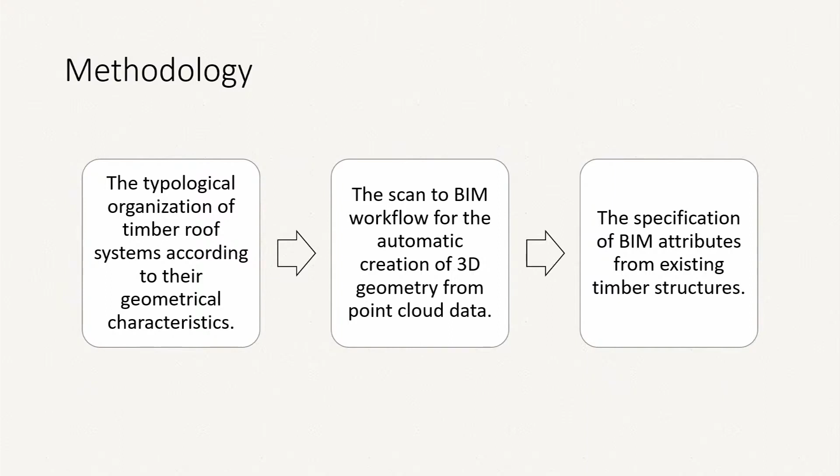The methodology starts with the typological organization of timber roof systems according to their geometrical characteristics. Then is the Scan-to-BIM workflow for the automatic creation of 3D geometry from point cloud data. And then is the specification of BIM attributes from existing timber structures. The typologies are related to heritage buildings, but also buildings to be reconstructed and demolished with a timber roof construction.

The aim of the typological organization is to assist the Scan-to-BIM methodology by organizing early in advance the capturing of existing data, the segmentation, and the creation of BIM geometry with high levels of detail. Furthermore, the typology of the structures and the respective geometrical data contains material and structural attributes that allow the examination of the level of maintenance.

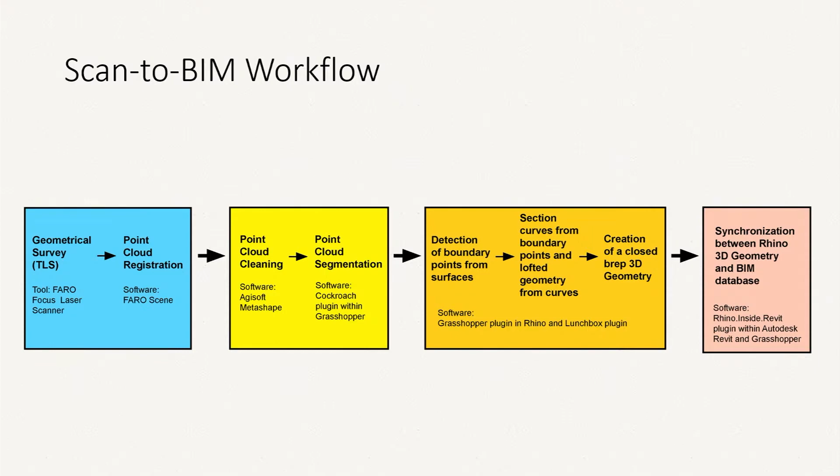This is the Scan-to-BIM workflow. It starts with a geometrical survey using terrestrial laser scanning through a Faro Focus Laser Scanner. Then the point cloud is registered within Faro Scene. After the point cloud is exported, it is cleaned using Agisoft Metashape, and then the point cloud is segmented using the Cockroach plugin within Grasshopper.

After the segmentation, there's an algorithmic process in the Grasshopper plugin in Rhino and Lunchbox plugin, which starts with the detection of boundary points from surfaces, the creation of section curves from the boundary points, lofted geometry from the curves, and the creation of a closed BREP 3D geometry. This 3D geometry is synchronized with a BIM database using the Rhino Inside Revit plugin within Autodesk Revit and Grasshopper.

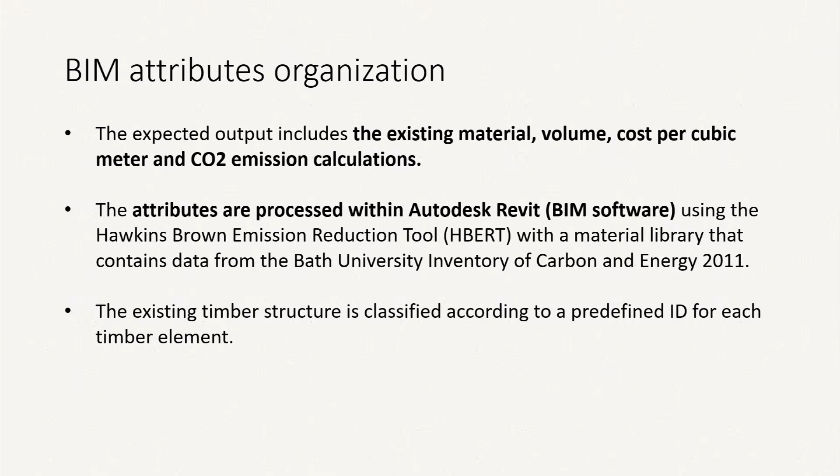The BIM attributes include the existing material, the volume, the cost per cubic meter, and carbon emission calculations. The attributes are processed in Autodesk Revit using the Hawkins-Brown emission reduction tool with a material library that contains data from the Bath University Inventory of Carbon and Energy 2011. The existing timber structure is classified according to a predefined ID for each timber element.

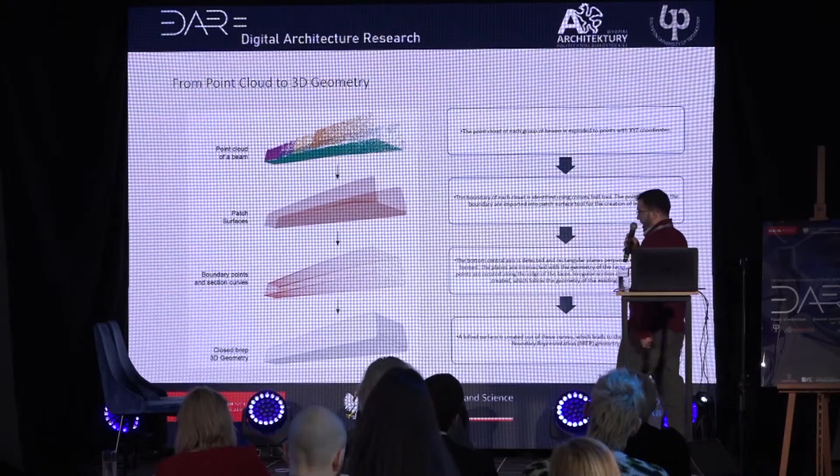And then on the third image, you can see the boundary points and section curves. Basically, the bottom central axis is detected, and rectangular planes perpendicular to the axis are formed. The planes are intersected with the geometry of the faces, and the boundary points are created along the edge of the faces. Irregular section curves of each beam are created which follow the geometry of the existing structure.

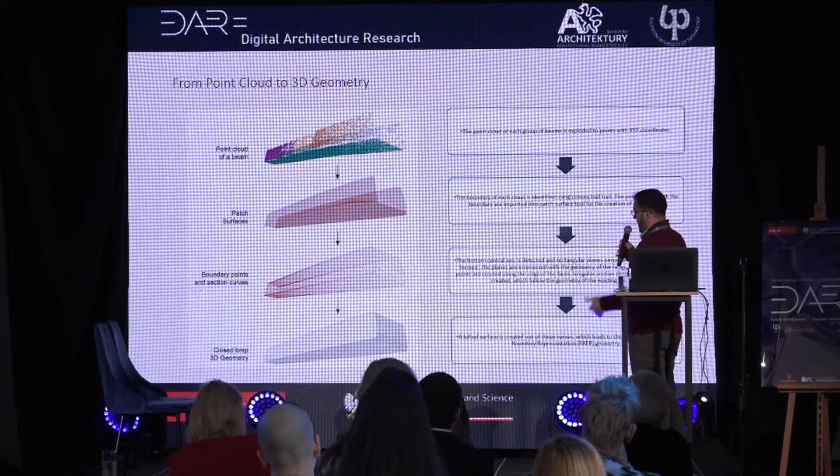And as you can see, on the faces, these are the points that are detected, which are necessary to identify the geometry of the existing beam. And the lines that you see are the connections of these points that create 100 to 300 section curves according to the type of geometry developed. And on the bottom is the closed BREP 3D geometry created.

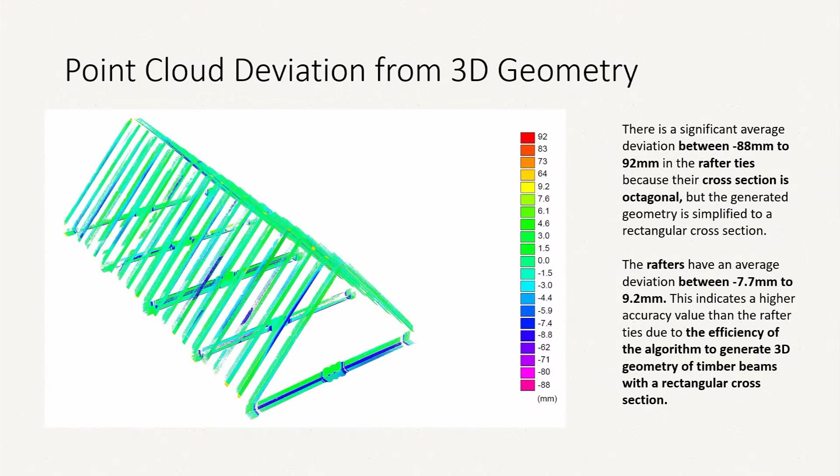In contrast to this, the rafter ties had lower accuracy, and the deviation was between minus 88 and 92 millimeters. And this happens because their cross-section is octagonal rather than rectangular, and the generated geometry is simplified to a rectangular cross-section.

The 3D data created is synchronized within Autodesk Revit using, as I said, the Rhino Inside Revit plugin. The geometry direct shape is used, and also the category is defined, which is structural framing, the 3D geometry, and the corresponding material. And the material that is used from the HBERT library is HBA wood softwood, because the existing material is pine timber. And furthermore, an ID is also set for each beam.

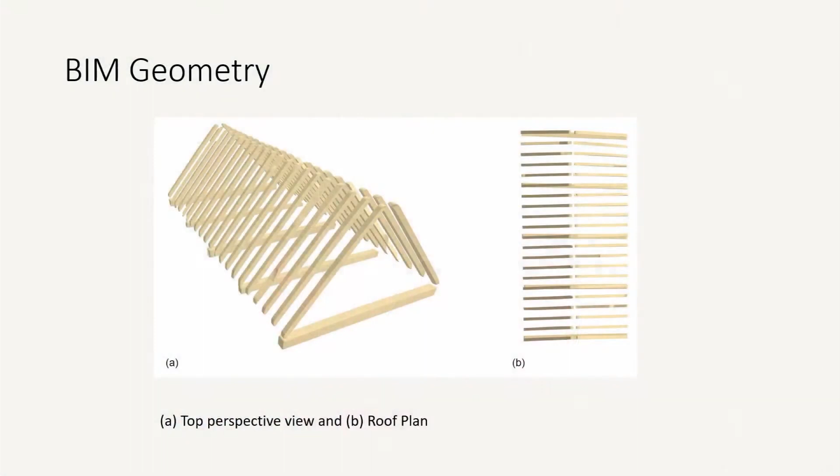This is the geometry that is automatically generated and is synchronized within BIM software. On the left is the top perspective view, and on the right is the roof plan. And as you can clearly see, there are some irregularities detected due to the architecture of the building, which is a heritage building, and usually these buildings have irregularities.

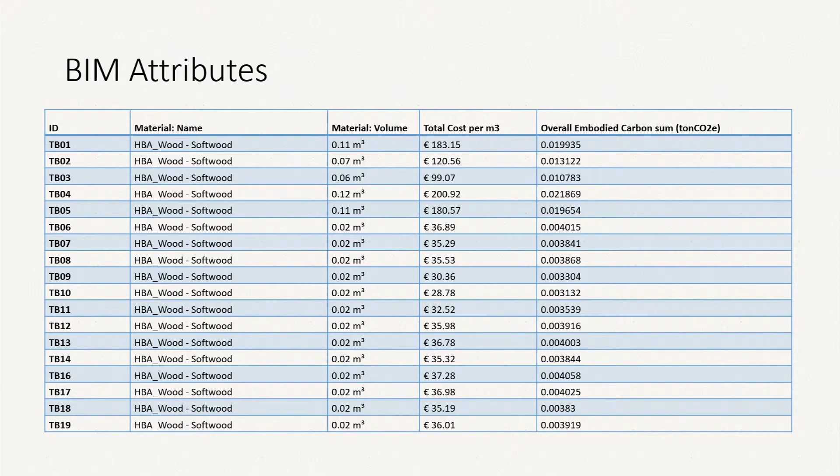These are the BIM attributes from this process. On the left, you can see the ID that is defined for each beam, the material, and then the volume that is detected, the total cost per cubic meter, and the overall embodied carbon sum. In total, the beams are 47, but eventually the volume of 11 out of these beams could not be calculated due to scanning issues mentioned previously.

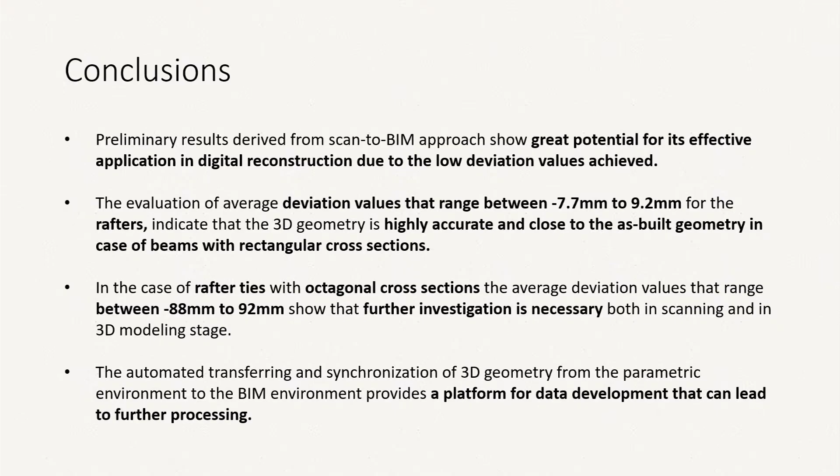In conclusion, preliminary results derived from the Scan-to-BIM approach show great potential for its effective application in digital reconstruction due to the low deviation values achieved. The evaluation of average deviation values that range between minus 7.7 millimeters to 9.2 millimeters for the rafters indicate that the 3D geometry is highly accurate and close to the as-built geometry in case of beams with a rectangular cross-section.

In the case of rafter ties with octagonal cross-sections, the average deviation values that range between minus 88 to 92 millimeters show that further investigation is necessary both in the scanning and in the 3D modeling stage. The automated transferring and synchronization of 3D geometry from the parametric environment to the BIM environment provides a platform for data development that can lead to further processing.

The potential for calculating CO2 emissions along with the corresponding cost for each timber beam provides us with BIM attributes that allow decisions to be made as regards the preservation, recycling, and reuse of existing timber elements. Future studies may include additional laser scans in the interior of the church in order to capture the missing volume of the geometry from 11 beams that could not be calculated in BIM.

And further laser scanning could be done on the exterior of the church for achieving the generation of 3D geometry of more timber structural elements such as the ridge, wall plate, and battens. Further research is also necessary for a much more detailed result for the rafter ties that contain octagonal cross-sections.

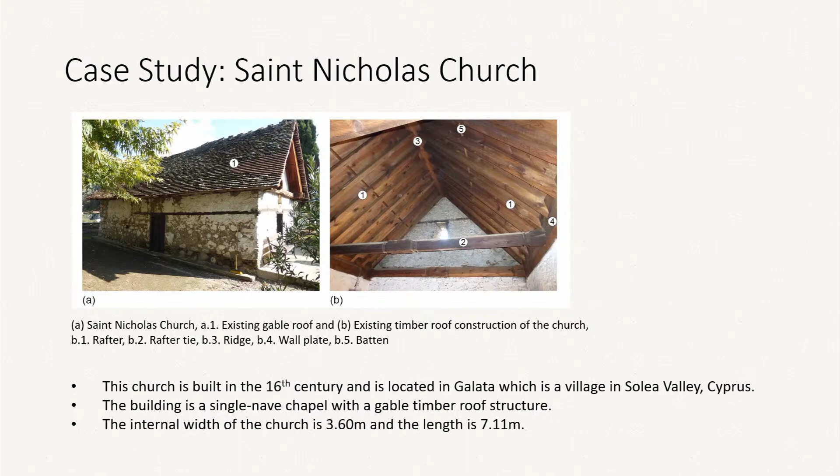In order to also find the joints, I have to do a scanning on the outside, because, I can show you an image. So as you can see here, on the top is the ridge. This ridge is visible from the outside, from the exterior. So I had to find the cross-section of that and then generate that geometry, and then it's going to be connected with the other ones. The same with the wall plate, because it's not visible from the inside. It's visible from the outside, so the same happens there. So if I have this, then the beams could be connected.

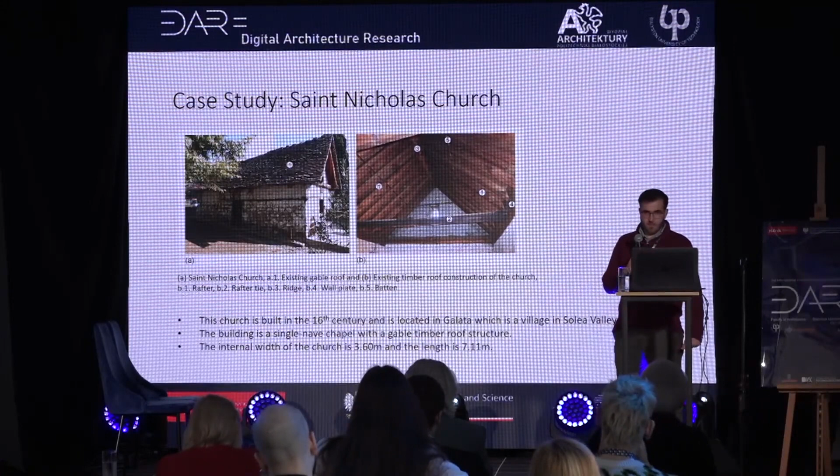Hello. Thank you for the presentation. I missed the start a little bit, so I didn't know what you really focus on. Is the CO2 thing the main focus, or what do you want to achieve with it? The main focus is basically the automatic generation of 3D geometry from point cloud data.

Okay, then I understand, because in this case I was wondering if it is necessary to have so much precision, because you could just imagine that these beams would be of similar size, and as long as you have the number of them, you can have a rough calculation pretty quickly, and many of them probably are the same size. And it doesn't really matter if on the fifth decimal there is something different. But to show the workflow, it makes sense.

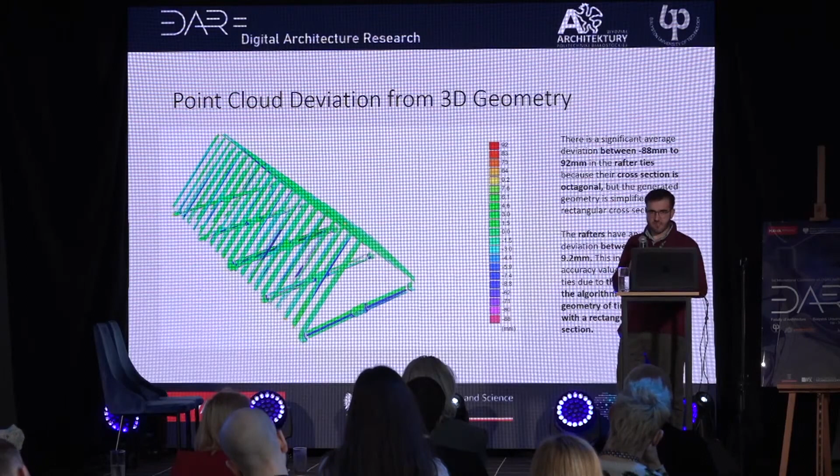Yeah, I understand that. Yeah, the aim is to identify also the irregularities of the geometries, because it's a heritage building. Sure. Yeah, because wood, and old wood, is never the same. But it depends what you want to have as an outcome. But the rafter ties have different dimensions, but not that much, as you said. But there are some changes in the volume.

Yeah, but okay, it's a question of how many numbers behind the 0 point really matter. So therefore I was wondering, but it's an interesting workflow and it might be usable for a lot of things. Thanks. Thank you. Thank you for the presentation.

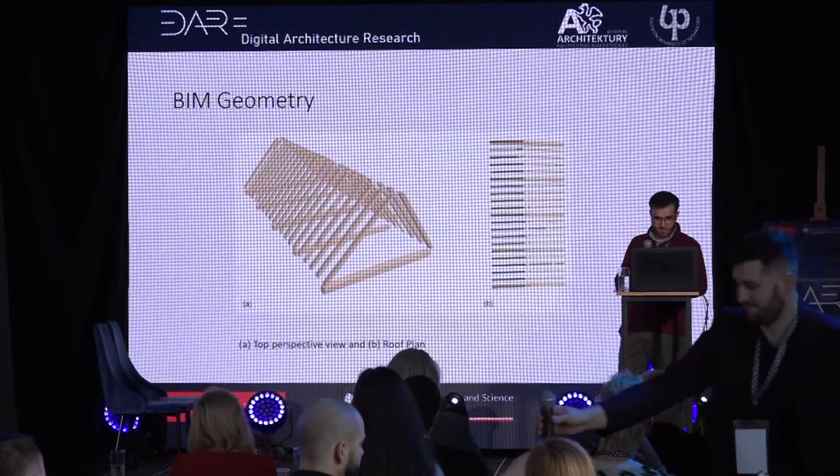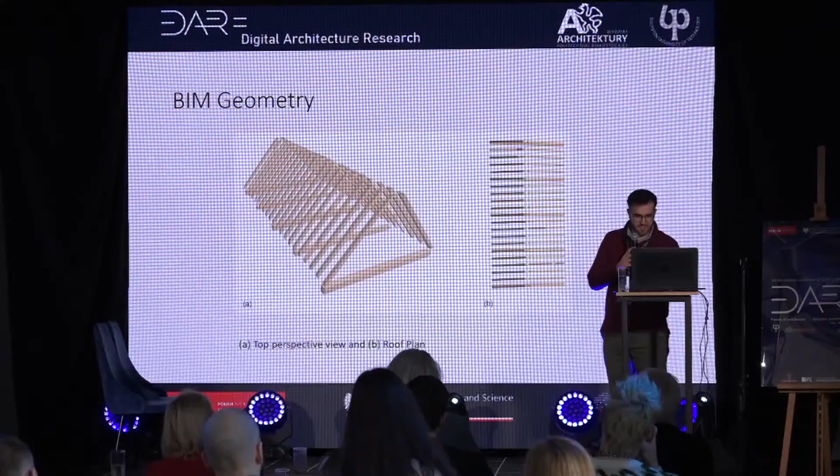Where does the final user, I know that to create the workflow your ideas had to be translated, but where does the final user interfere with this workflow? Okay, so you mean if there are many users through that workflow? No, you have the scanned point cloud. You upload it to the script. And do you have to make some inter-script actions, or do you just get an answer in the form of a BIM file? Okay. The points are within Grasshopper.

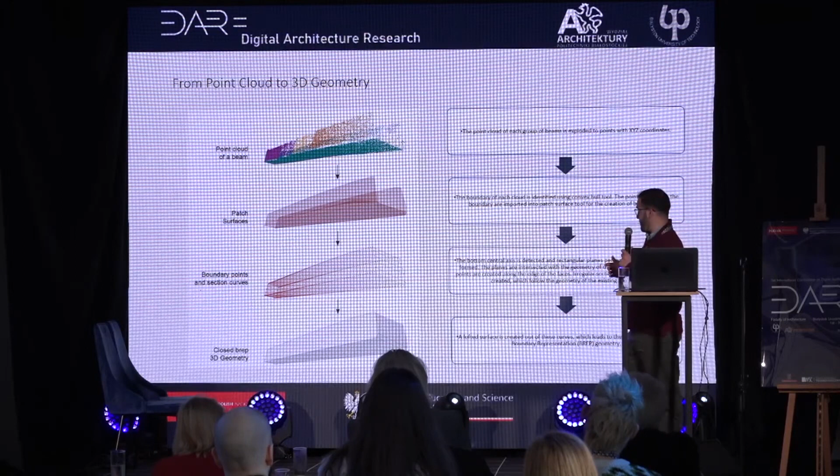As I said, they are exploded into coordinates. So these coordinates are on each point of the beam. So the coordinates define where the beam is placed. And then according to these coordinates, as you can see on this image, each face is created separately. The boundary of each face is detected, and this gives us the edge for each beam, and sections are created on the beam, and this provides us with the points on the edge.

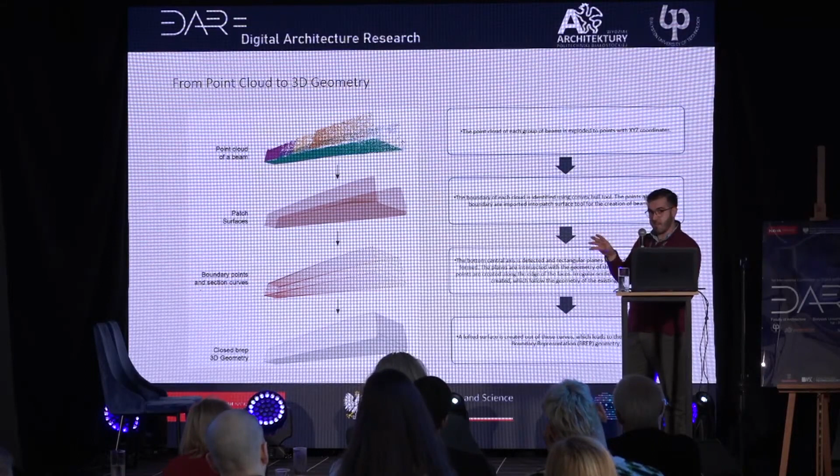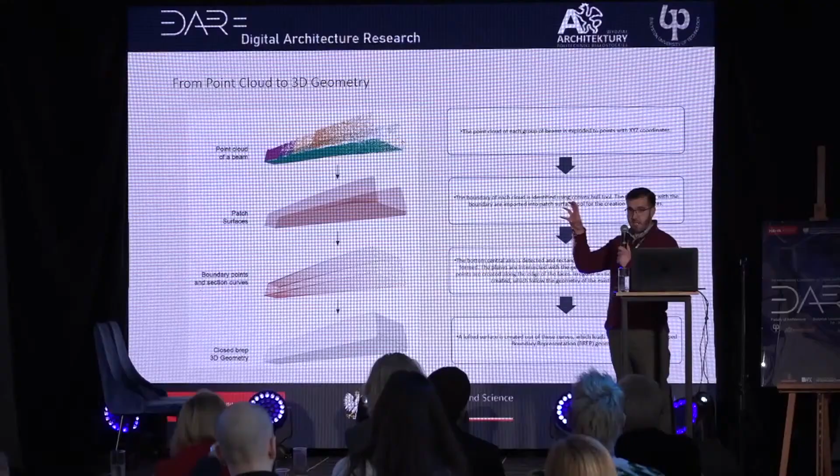So using this workflow, you can have the whole beam and also the irregularities, because each section is different, because it's tilted. Maybe it's visible from the geometry as well. So that's how it works basically, and the lofted geometry is created. So it happens automatically from point cloud to closed geometry? Yes, it happens automatically, as long as the algorithm is done correctly.

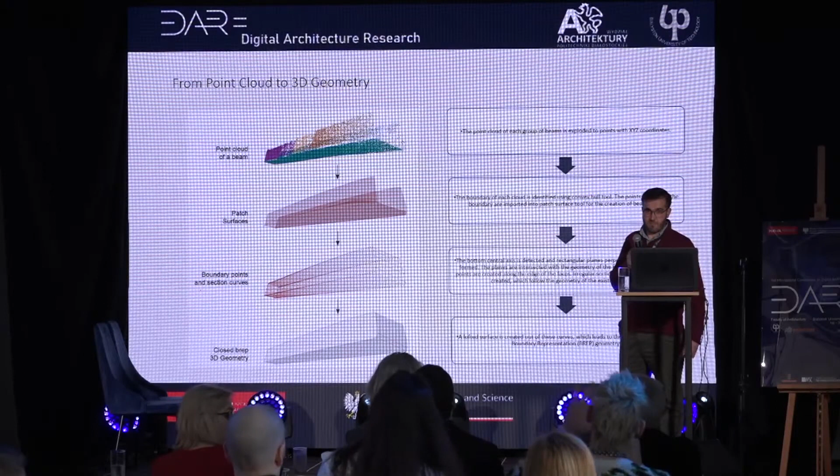There are always changes that need to be made, obviously, because the point cloud is too heavy data. But yeah, it worked. I tried it for every beam and it worked. So when you have the point cloud data, you have to manually adjust it and make it not so heavy so the algorithm can process it properly?

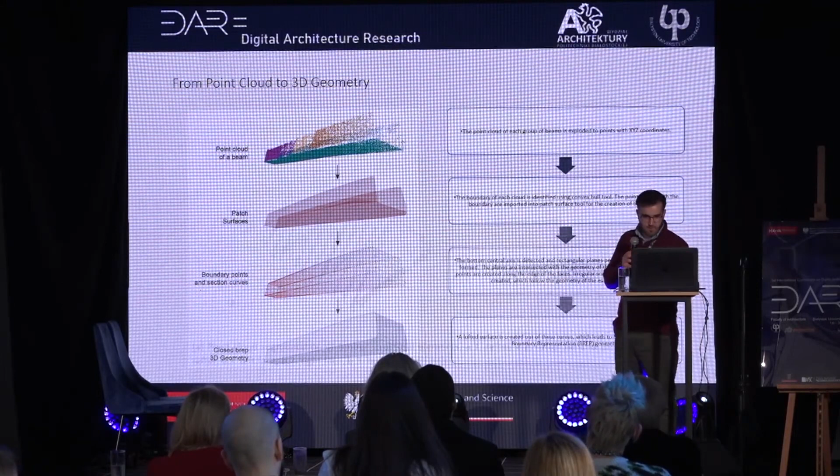Exactly, yeah. As I said, the point cloud was downsampled. The initial points were around 64 million. Only 25% of these points are used, because otherwise it would be too heavy and the algorithm wouldn't work. And when you showed us the different sides of a certain beam, do you need to define those sides manually, or can the algorithm detect that this is a beam and it has 3 or 4 sides? Yeah, that's a good question.

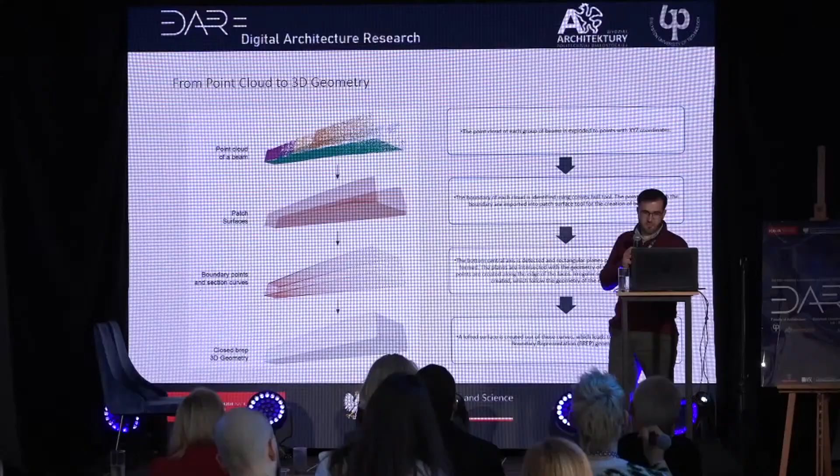Right now, as I said, the left face, bottom face, and right face are defined manually. The cloud is set manually. But obviously, a good next step would be to use machine learning or similar processes to detect the faces automatically. Okay, thank you.

Hello, thank you for the presentation. I would like to ask, in this process you were talking about this specific case study of the church. If you apply the same method to a different place, do you think it is a general way that would work for any other similar structure, or is there something specific to this church that you considered?

Yeah, good question. The aim is to apply this to different types of architecture as well, to different types of timber roofs. That's the whole point, to try it on different types of architecture, not only this, but other churches as well.

Yeah, thank you for the presentation. I think you just answered my question. But to extend that, so your intention is also to create this for different forms, right? Because now you have the 3 faces. Are you intending to try to create a similar script for other forms?

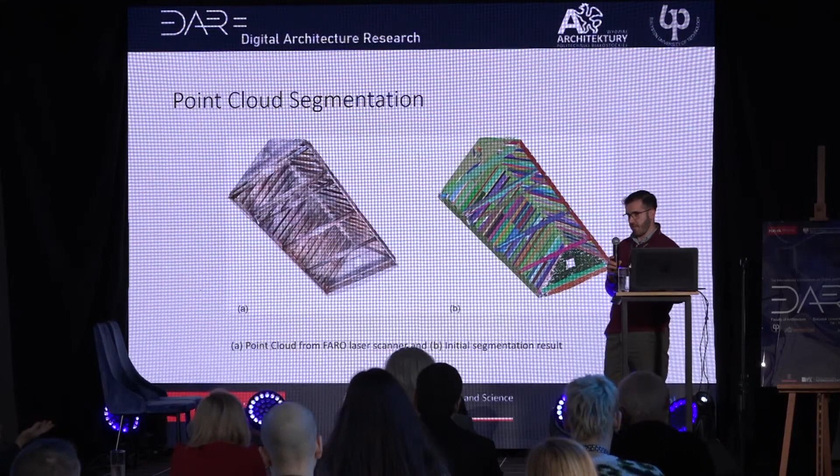And does it matter or not? Was it just because it was handmade, the human capacity to make them as the same as possible at that time, or maybe climate, moisture, etc., changed these elements slightly over the years or decades or centuries? In such cases in Poland, there is always a huge discussion about what to replace and how to replace it.

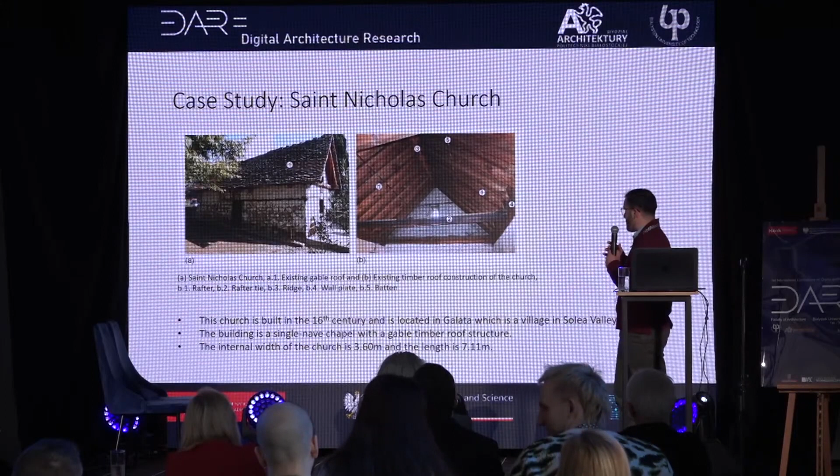So whether these values after the comma matter or not, to make the element you are replacing totally the same or similar. Yeah. For example, this rafter tie was a sort of sculpture, as you can see in the center. It is sculptured with Byzantine methods of sculpting wood. So let's say that beam is destroyed for a certain reason and needs to be replaced.

The best way, I believe, is to find someone who can remake it by hand, obviously, but if that's not possible, then you can scan it in much more detail and process it so that you know the geometry and recreate it. Okay, thank you. Thank you very much.